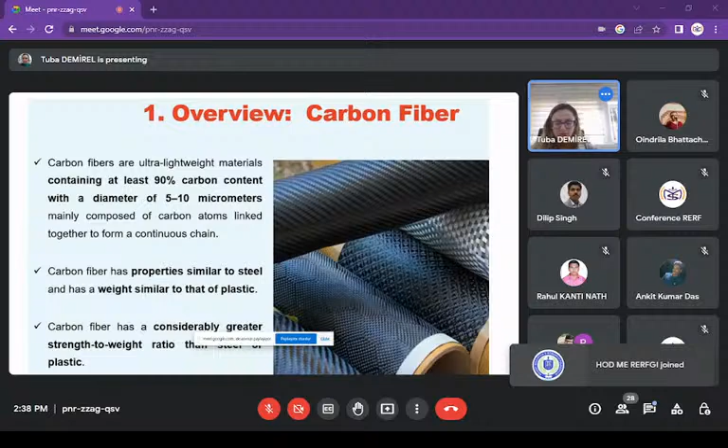The definition of carbon fiber and its historical development: carbon fiber is a polymer, sometimes known as graphite, with a strong molecular structure. The original carbon fiber concept traces back to inventor Thomas Edison, who applied it to light bulbs.

Properties of carbon fibers include high tensile strength and rigidity, corrosion resistance, electric conductivity, and a very important property: fire resistance.

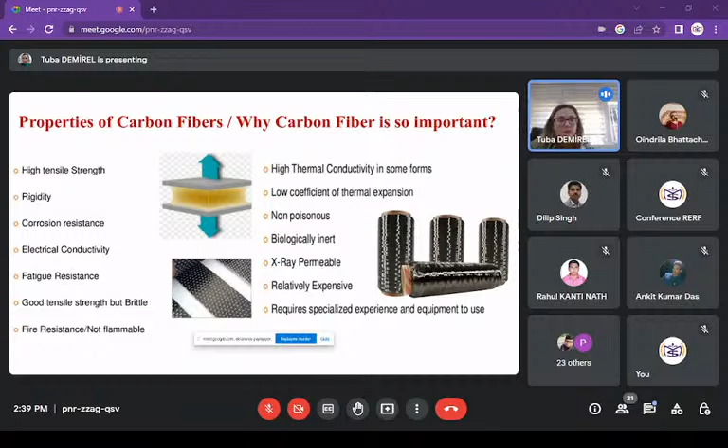Carbon fiber is used especially in textile sectors and composite sectors. In the market, low cost fibers will become a reality in the next 10 to 12 years, and the carbon fiber market has grown at an annual average rate of a significant percentage over the last 20 years.

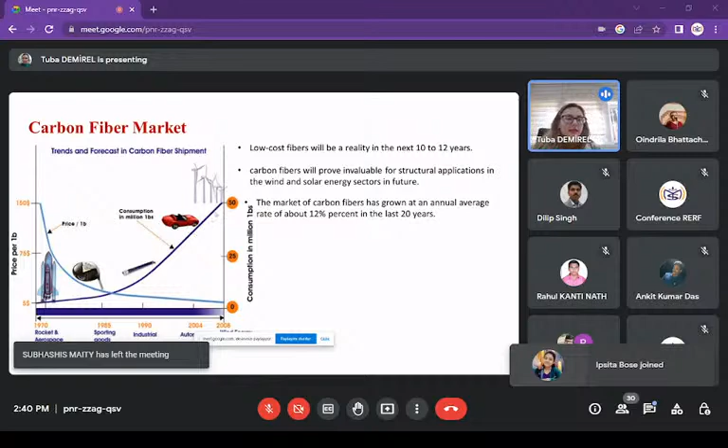Looking at this picture, we see the increasing use of carbon in industry, especially in carbon polymer composites. Applications are very important, particularly in civil engineering and automotive parts.

In aerospace engineering, today's technology uses carbon composite materials in the aerospace industry because they do not flame when heated, even under very high heating conditions.

Medical applications are very important today because carbon fiber polymer composites are strong materials that are lighter in weight than steel.

There is use of carbon fiber reinforced polymer in implants and other processing applications. The structure of carbon fiber is also very important.

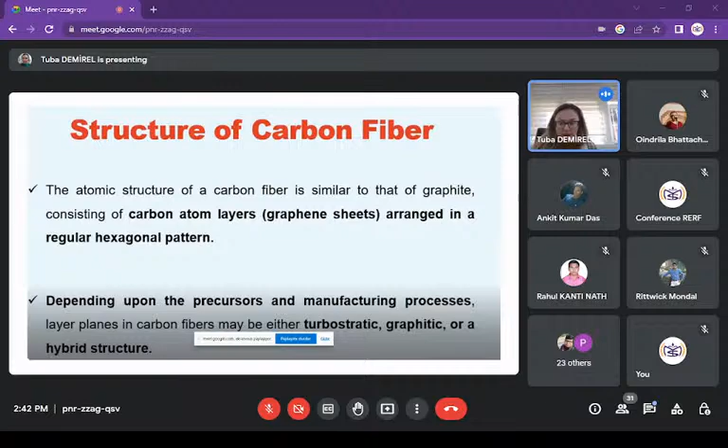Carbon atom layers, also known as graphene sheets, are arranged in a regular hexagonal pattern. Depending upon the precursor and manufacturing process, layer planes in carbon fibers may be either turbostratic, graphitic, or a hybrid structure.

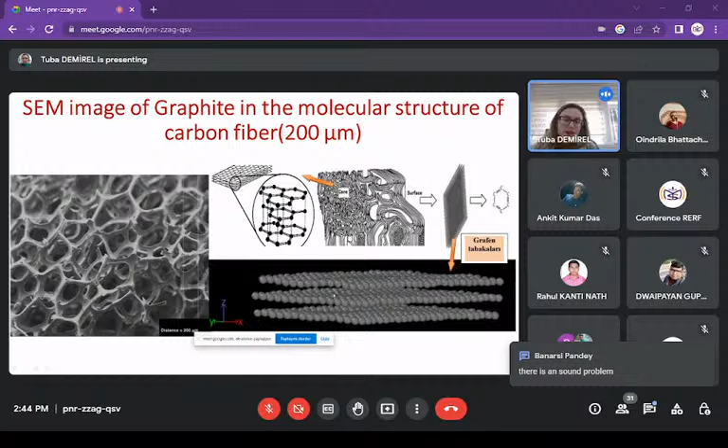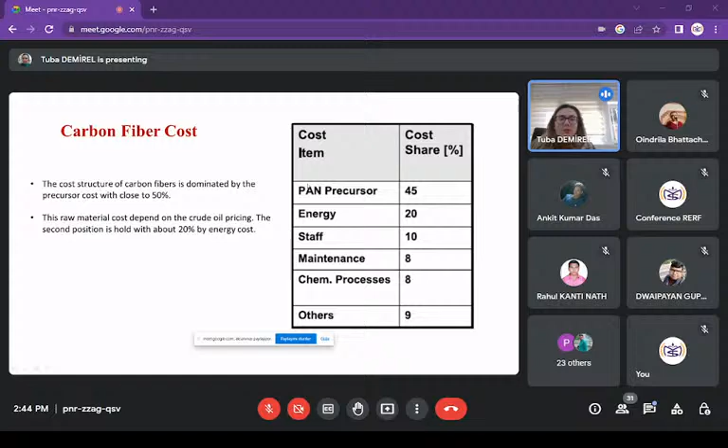What is carbon fiber made from? Looking at production from research, the main original materials for carbon fibers are PAN, viscose rayon, and pitch.

PAN fiber is made from PAN raw material. Viscose rayon is made from cellulose. Pitch is a much less expensive raw material than PAN.

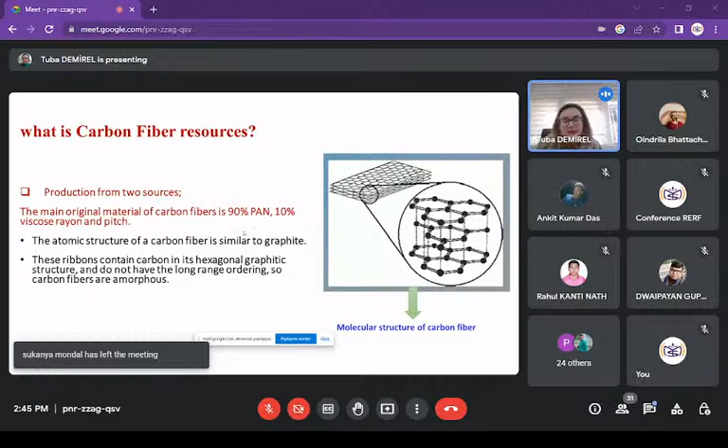The atomic structure of carbon fiber is similar to graphite. Commercial precursors for carbon fiber manufacturing include PAN from crude oil, rayon from cellulose, and pitch from petroleum or coal tar, including mesophase pitch.

Average tensile strength is very important; PAN has better tensile strength than other raw materials, and its carbon yield is also notable.

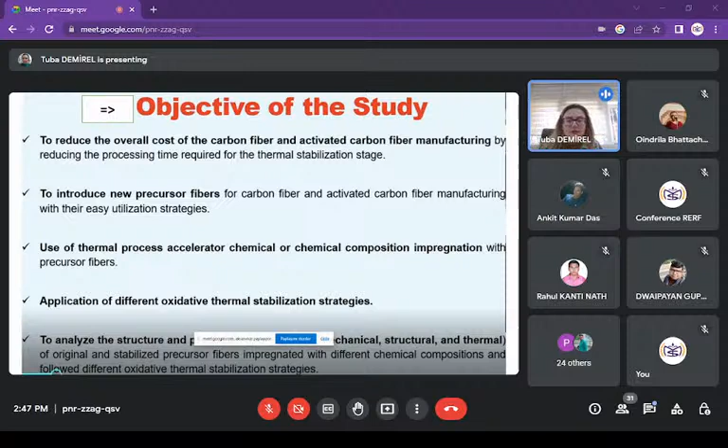This involves use of a thermal process accelerator, chemical composition impregnation with precursor fibers, and application of different oxidative thermal stabilization strategies.

Looking at the production stages: stabilization fiber, carbon fiber, and activated carbon fiber are the three main production stages. The first stage, for carbon fiber, is the stabilization or oxidation stage, occurring at 200 to 300 degrees centigrade with a heating time in an air atmosphere.

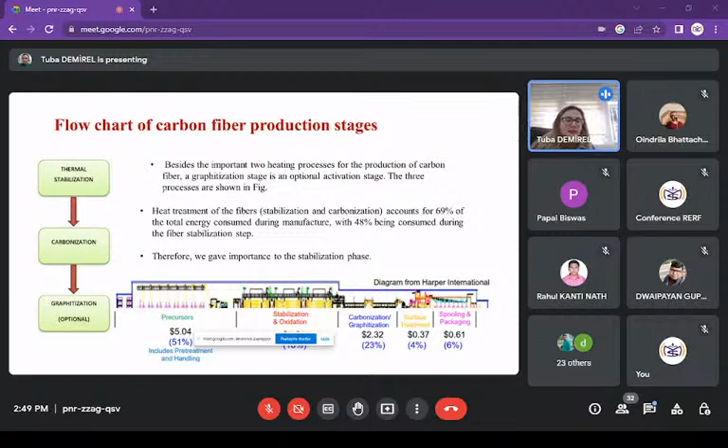Heat treatment of fibers accounts for 69% of the total energy consumed during manufacture, with 48% being consumed during the fiber stabilization step, so we give importance to the stabilization phase.

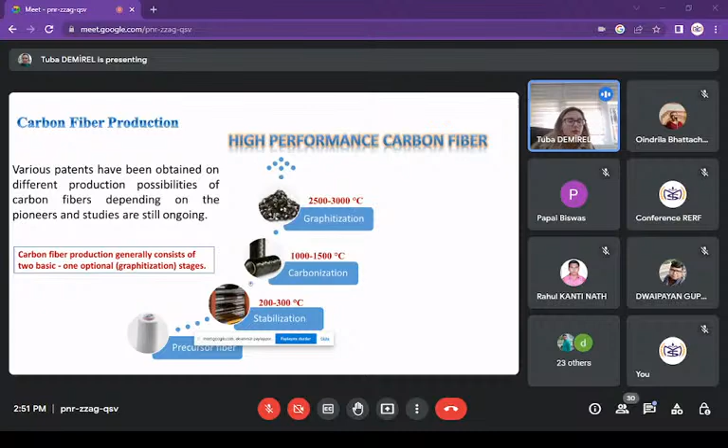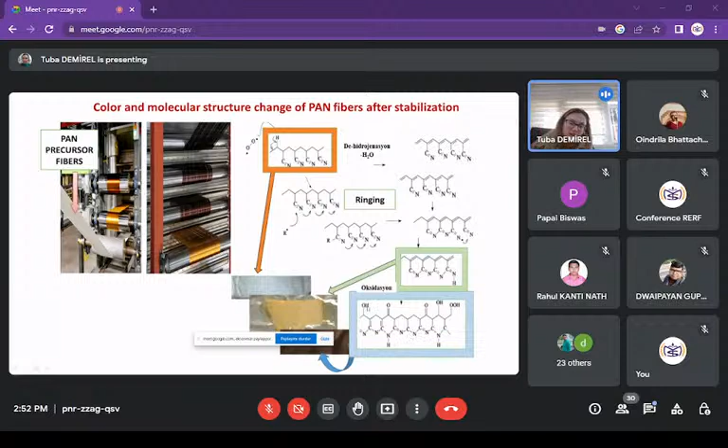This shows the color changing and oxidation process, with the whole ringing molecular structure. These are the fast carbonization stage and graphitization stage, showing the whole ringing molecular structure.

Objective of the study: to reduce overall carbon fiber and activated carbon fiber manufacturing processing time required for the thermal stabilization stage.

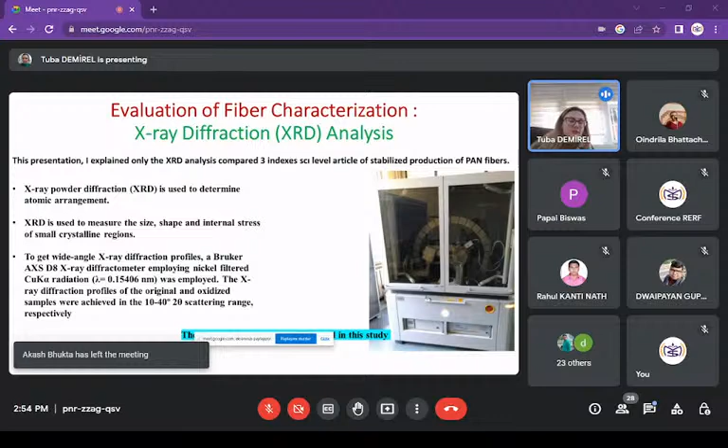X-ray diffraction analysis is very important because it determines atomic arrangement and is used to measure the size, shape, and internal stress of small crystalline regions.

In my experimental studies, I published articles. I will explain my first article: a study on structural characterization of thermal stabilized PAN precursor fibers impregnated with ammonium bromide before the carbonization stage.

This covers thermal oxidative stabilization of polyacrylonitrile PAN fiber pre-treated with 5% ammonium bromide, performed in air atmosphere at temperatures between 200 and 250 centigrade for periods of 5 to 75 minutes using a multi-step approach.

The studies demonstrate that ammonium bromide incorporation is highly effective in accelerating nitrile group cyclization by reducing the time required for thermal stabilization; this structure is very important, and ammonium bromide accelerates the stabilization process.

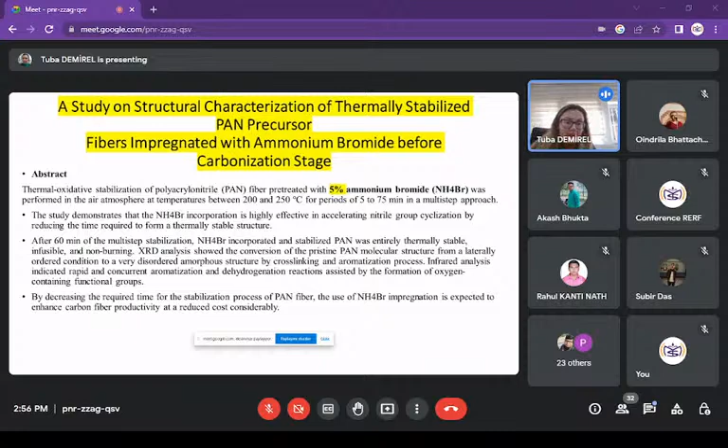The use of ammonium bromide impregnation is expected to enhance carbon fiber productivity and reduce cost considerably.

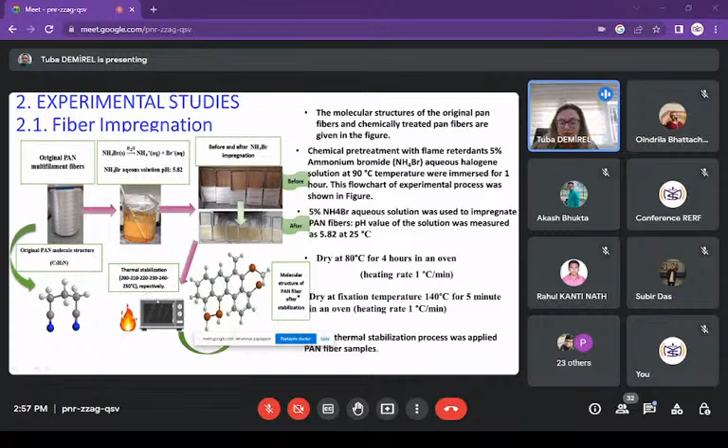This shows my fiber impregnation process: the fiber is treated with ammonium bromide water solution for impregnation, then dried in an oven, followed by multi-step stabilization respectively, resulting in whole black fibers.

The fiber stabilization pictures are shown on the left.

Using FTIR analysis, it has been observed that fiber burning is influenced by the accelerated cyclization reactions, resulting in non-burning behavior after stabilization.

After stabilization at 30 minutes compared to 5 minutes and 15 minutes stabilization time, it is clear that the pictures gradually change from white to reddish brown to blackish and black during thermal pretreatment in air atmosphere with increasing temperature and stabilization time.

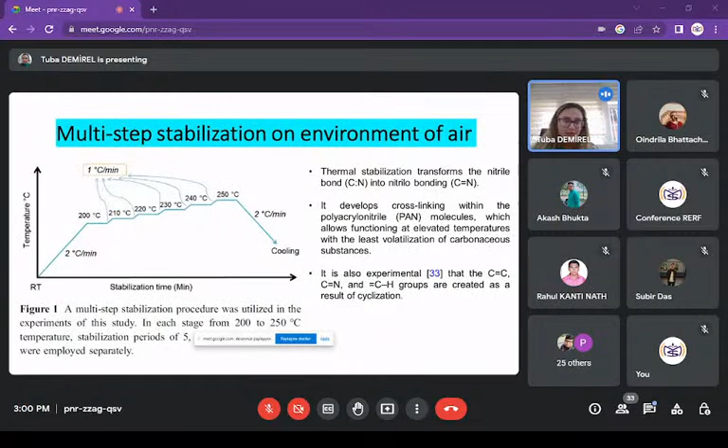With the same stabilization time, the ammonium persulfate treatment shows color change in the fibers.

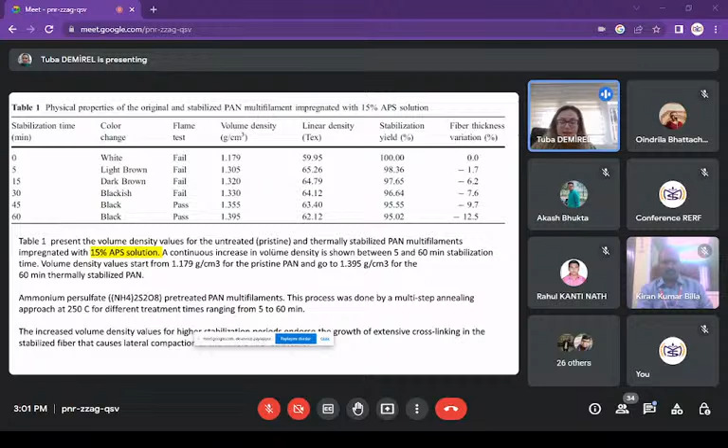These experimental conclusions show increased volume density values for higher stabilization periods, and the growth of extensive cross-linking. Cross-linking is a ring molecular structure important in the stabilized fiber that causes lateral compaction, affecting this fiber's physical and mechanical properties.

With 15% ammonium persulfate impregnated, the volume density will increase. Linear density increases rather than reduces, and tensile strength permanently reduces.

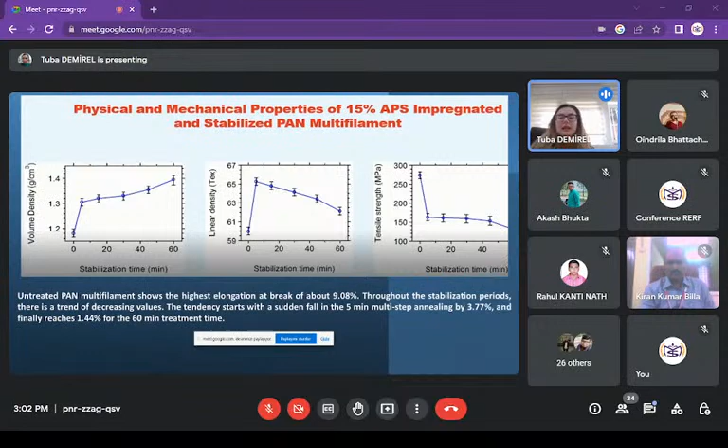Other articles discuss the impact of guanidine carbonate incorporation. In this article we use guanidine carbonate at 15%, which was found to be optimum incorporation in the precursor fibers as an accelerant, the same as the other accelerants used.

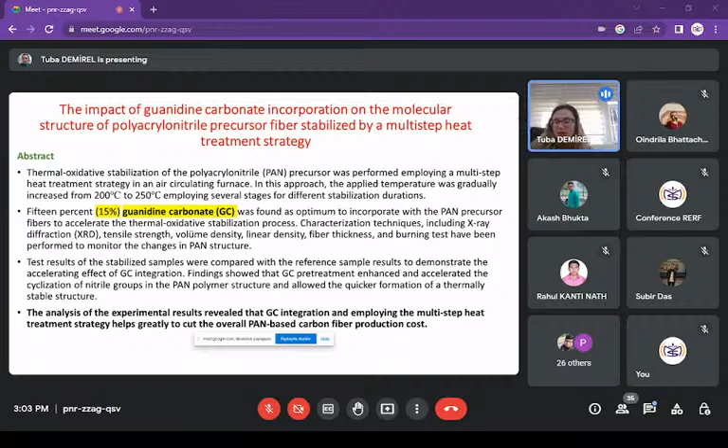Analyzing the same as the other two articles, characterization technique is very important: XRD for carbon fibers is very important, and FTIR analysis is also very important, as these present and explain the molecular structure and the multi-step stabilization, systematic diagram, and experimental results are very important.

For compositions and physical properties: 5% ammonium bromide in water solution, 15% ammonium persulfate in water solution, and 15% guanidine carbonate in water solution. Then the raw material or precursor PAN fibers are impregnated.

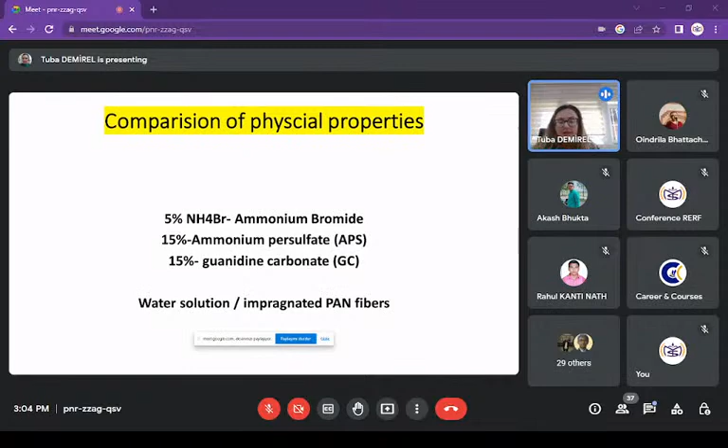Comparing the physical properties of guanidine carbonate and ammonium bromide: guanidine carbonate has a 45-minute stabilization time, while ammonium bromide is 60 minutes, and ammonium persulfate stabilization time is 45 minutes.

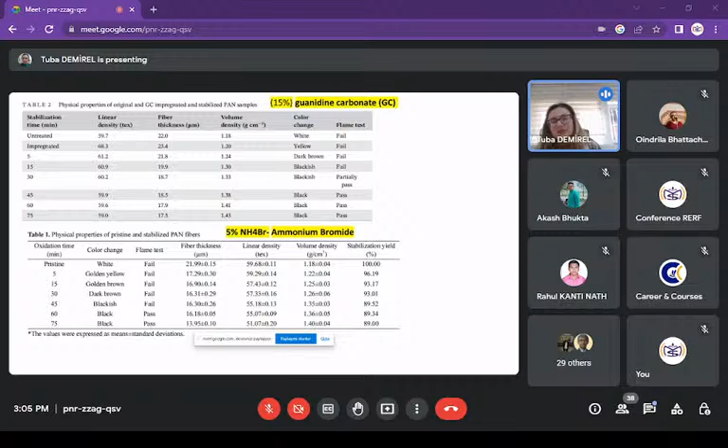Accelerating is the stabilization stage. Comparing guanidine carbonate and ammonium persulfate at the same concentration, the 45-minute stabilization time gives black color for guanidine carbonate, and ammonium persulfate at 45 minutes gives the same black color.

Converting the color changing, then looking at linear density, this is 63 linear density. This shows mechanical properties are very good for ammonium persulfate.

In the XRD of the original PAN, there are two dominant bands with spacing in nanometer indexing, and this indexing is 100 and 110 corresponding to the hexagonal unit cell.

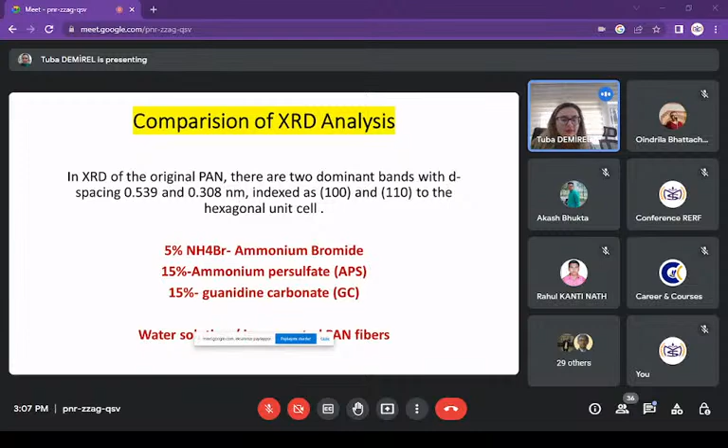This comparison shows the best chemical water solution is respectively very important. Guanidine carbonate has very good mechanical properties, then ammonium persulfate, and then ammonium bromide is a good material, but guanidine carbonate is best. This is X-ray crystallinity comparison.

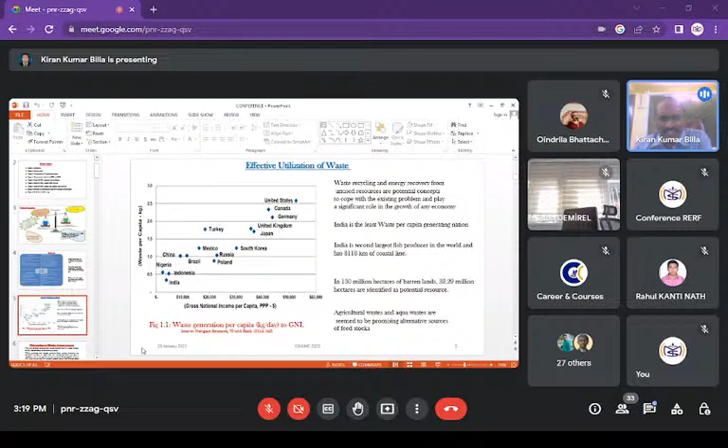That's an issue. This is about waste utilization in countries. Though India is in a last position among waste generating countries, we have to think of our neighbors also. The United States is the highest waste generating country, and they are utilizing the waste too. That is another issue.

In my short span of 2 or 3 years of research in this area, I have found vast fish discards - we have a very lengthy coastal line of 8,118 kilometers, in which huge discards are generated annually. This is gently pushing away what could be a valuable feedstock - we could utilize it, but we are just pushing it into the sea, oceans and rivers also.

If we segregate some part of that fatty mass, like heads, tails and some skin, we have so much fat in that, and that fat can be converted into biodiesel, which can be utilized. Of course, we have some issues with the biodiesel, which I'll discuss in the last part. So first, we can generate some useful outcome through that waste.

Secondly, another area I have found is we have a huge potential area of what you call wasteland. We can't really call it wasteland, but unproductive land. Government sources estimate around 32 million hectares of unproductive land have been identified. And not only that, we have a huge amount of rural roads and highways, so if we use the land on both sides of these roads...

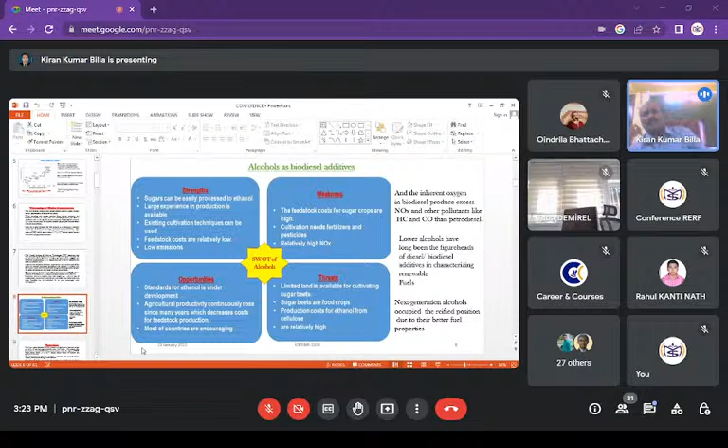So I already told you these biodiesels have some operational problems, like heavy fumes and toxic gases coming out. So particularly for that problem, people generally use additives to compensate.

In my perspective, I have gone through some papers where they have used, and also practically generated, higher alcohols. Generally, lower alcohols is what I found being used in the literature. But on the other hand, if we use higher alcohols in place of lower alcohols, we can have better versions of future fuels. I found practical examples like N-octanol and pentanol.

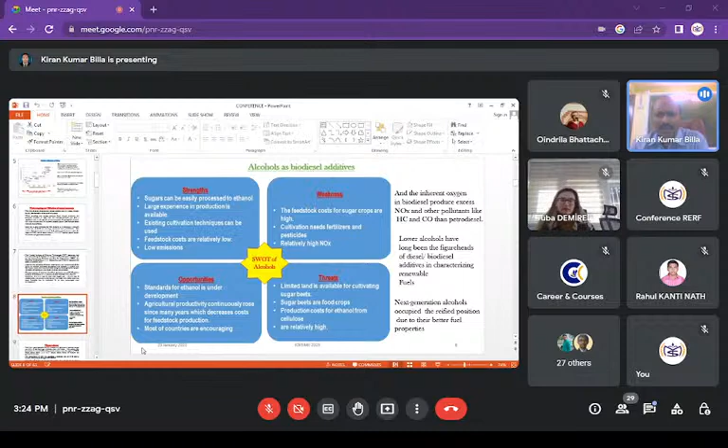These higher alcohols are easy to generate. They can be produced in a renewable way, and we can operate with them economically. So these can be, we could say, next generation alcohols. In a sense, they will occupy the refined position of lower alcohols.

Coming to that, I told you I've gone through literature reviews using lower alcohols, and very few using higher alcohols, particularly with these waste biodiesels generated using Jatropha and fish oil. So using higher alcohols with Jatropha, what I found is it's very viscous in nature, and it produces so much NOx.

Lowering that NOx is an issue with Jatropha. And using fish oil, which I generated from fish waste, what I found is heavy carbon monoxide is coming out. That's another issue I encountered.

So what I found is using another additive to suppress this NOx in one experiment, and in the other, if we try to control this excess CO using another additive, that will be helpful. I'll come to my first experiment.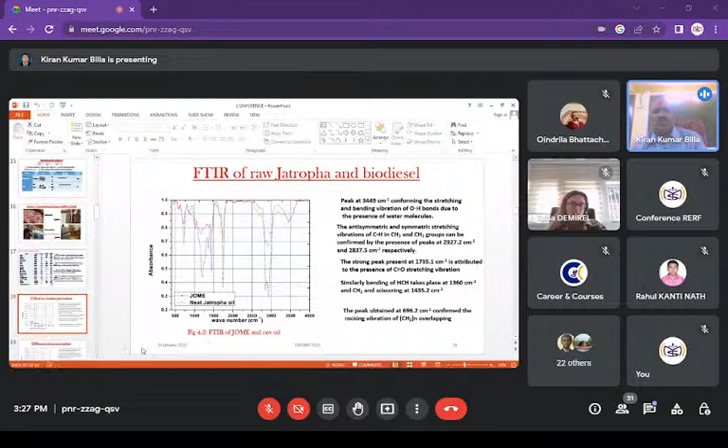Neat oils can be converted into biodiesels using transesterification. Using that phenomena, I have converted jatropha oil to biodiesel and fish oil to fish oil biodiesel. This is the other oil I have prepared - fish oil, with methyl esters of fish oil, MEFO.

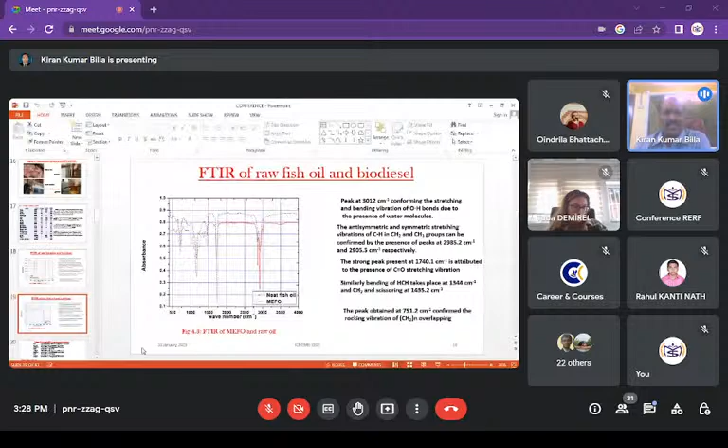Next, I have utilized 5% pentanol in this experiment. Many literatures I have found using higher amounts of fish oil, which is giving more NOx, more CO, and giving exacerbated NOx and exacerbated CO also. So in some literature I have found exacerbated NOx, and in some I have found exacerbated CO.

So I tried 30% of fish oil biodiesel also, but I'm not satisfied with the results they produced. That's why I reduced my extent to 20%, which I found to be very good - more compatible with diesel-like properties.

So what I blended is 20% fish oil with 5% pentanol, a heavy alcohol, higher alcohol we can say. That is a better combination, and I have utilized 25 with 5%, 20 with 10%, 30 fish oil with 5%, and 30 fish oil with 10% pentanol also.

These are the properties, and you can see M20 oil and M20 5% pentanol is almost equal to diesel, very compatible with diesel property. These are the baseline properties - fish oil, biodiesel, diesel. These are the properties of the base oils.

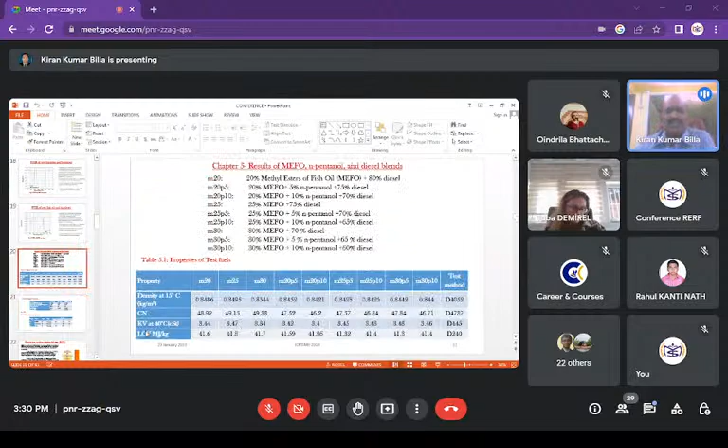Without going into the vast statistics generated by the engine, I have utilized response surface methodology to analyze the engine data produced with this numerous amount of combinations. I have utilized nearly 9 different types of combinations of fuel. Using that huge data, we call this analyzer using response surface methodology.

Response surface methodology - here I have utilized 3 input parameters: 20% fish oil, 25% fish oil, and 30% fish oil. There are 3 variables. I have utilized design matrix 3 into 3 into 3. The second parameter is pentanol - 0, 5, and 10. The last one is load: no load conditions, part load conditions at 0.5, and full load conditions at 1. These are the combustion aspects, where M20...

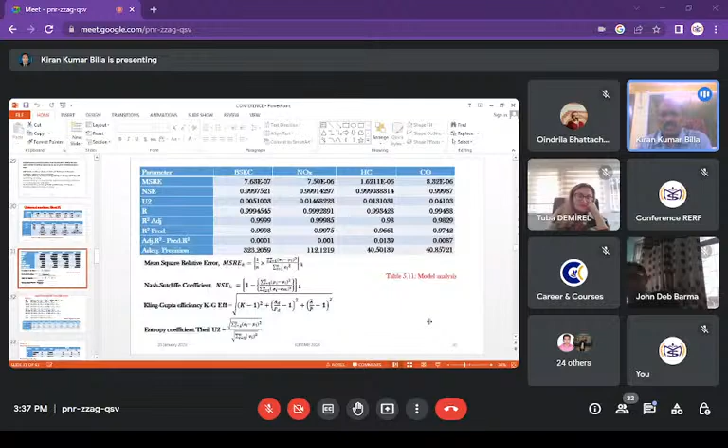Coming to the next one, I have utilized N-octanol with Jatropha oil. In this experiment, I have utilized the same 20% Jatropha, and 5 to 10% of N-octanol. So we can see the properties here.

In this second model, the three input parameters are N-octanol percentage, DEE percentage, and load. I utilized DEE because in my experiment I saw that the cetane number of the fuel was coming low, so I used a small amount, 2% to 4% DEE, to increase the cetane number of the fuel, since cetane number is an index of combustion. That's why I utilized DEE, to give good results.

So here I have utilized three inputs: N-octanol at 0, 5, and 10%, DEE at 0 to 4%, and load at 0%, 50%, and full load. In this one also the output parameters are the same. I checked carbon monoxide, unburnt hydrocarbons, NOx, and finally brake specific energy consumption.

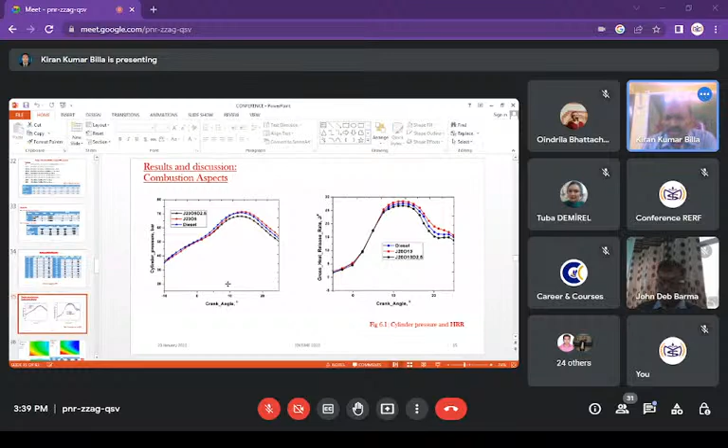Coming to another important experiment: as I told you, using 20% Jatropha oil and 5% to 10% N-octanol, the oxygen percentage and thickness get a little higher than conventional, which causes some oxygen and thickness issues.

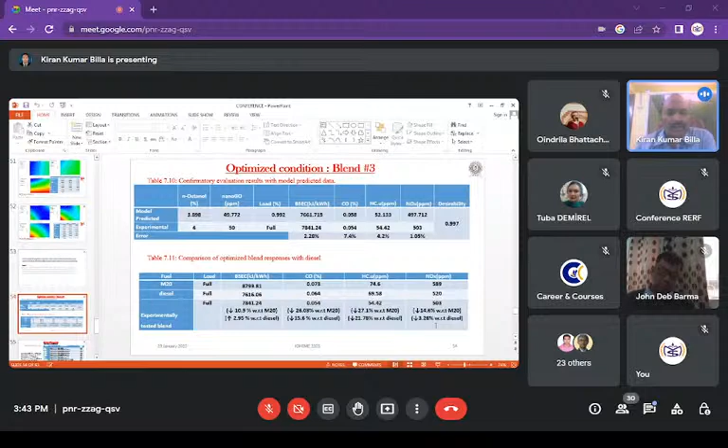The only issue is with storage, the oxygen content of the blend. What I can say from the experiment is, whenever you prepare that blend, you have to utilize it as quickly as possible, within 72 hours, or the efficiency will go down. So these are the conclusions.

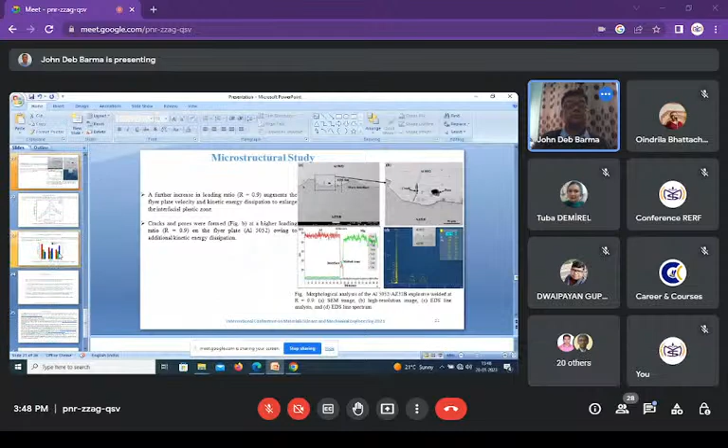Is my screen visible? Yes sir. As we can see on the screen, the topic is fabrication of AZ31B and AL5052 composite plates. AZ31B is a magnesium alloy and aluminum 5052, and this composite has been made through the explosive welding technique.

My presentation will be divided as follows: first introduction, then applications of the process, objectives, parent materials and their properties, experimental conditions and setup, microstructural study, mechanical properties, and finally conclusions.

So if we talk about explosive welding, maybe many of us already know the technique. It is basically a joining technique. Among the different welding techniques, in this one, the controlled energy of a detonating chemical explosive is used to create a metallurgical bond. The materials to be joined can be similar or dissimilar.

As we initiate the explosion, the chemical energy stored in the explosive is converted instantaneously into kinetic energy, which forces the flyer plate to impinge obliquely with the base plate to craft a metallurgically strong bond. So whatever we get as a result becomes metallurgically very strong.

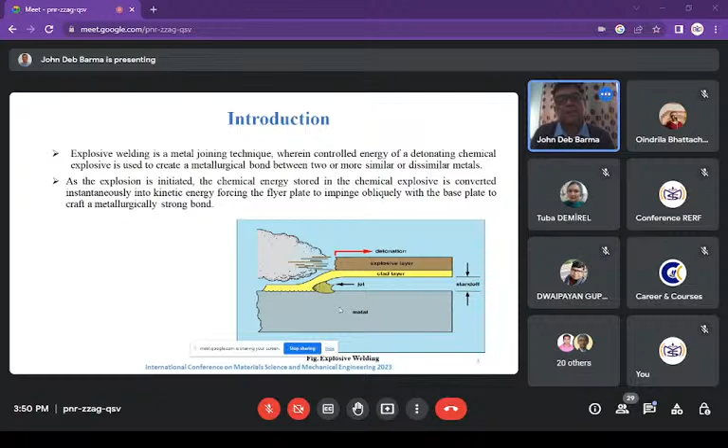Now, if we look at the principles of this welding technique, we can see that a controlled detonation of the explosive is used on the surfaces of the welding that is to be done. So when the explosion happens, it generates a high pressure force, which deforms the work plates plastically. And as the work plates deform plastically, it forms a metallurgical bond between these two plates.

The detonation process occurs for a very short period of time, and since it occurs for such a short period, the parent material doesn't get damaged. So that is the beauty about this welding process.

Now certainly there are some welding parameters which are very important in this welding, because these influence the welding, like standoff distance, velocity of detonation, how we are preparing the surface, and what kind of explosive we're using. So all these are very important.

As we can see in the figure, this is where we put the explosive, and this plate is known as the buffer plate, and this is the flyer plate. Welding between the flyer plate and the base plate takes place, and we keep a standoff distance.

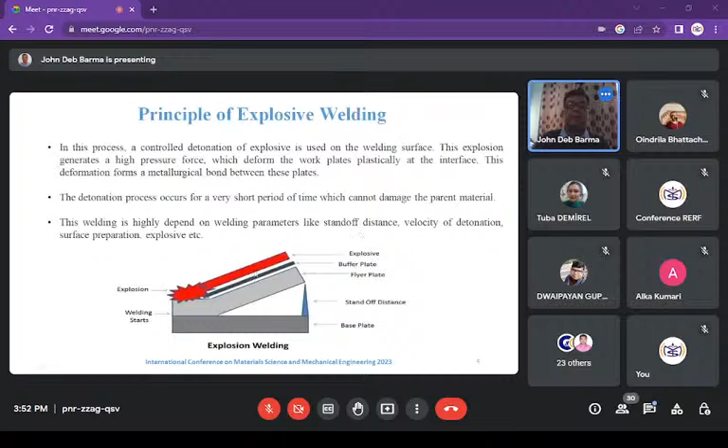Either you can keep the flyer plate parallel or at an angle on the base plate. As you can see in the figure, it is kept at an angle, but you can also keep it parallel. Then we have the buffer plate, situated on the flyer plate, which minimizes the effect of explosion. We always keep a standoff distance between the flyer plate and the base plate. Generally, double the thickness of the flyer plate is taken for thin plates, and equal to the thickness of the flyer plate for thick plates.

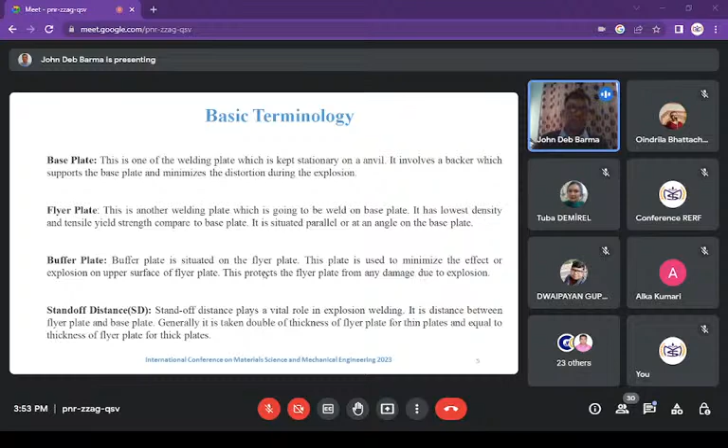Collision point velocity has to be less than the sonic velocity. There is another important term called the loading ratio, which is the ratio of mass of explosive to the mass of flyer plate. If the loading ratio is below the critical value, the terminal velocity of the flyer plate is insufficient and bonding will not take place.

On the other hand, if we keep a large ratio, it will produce molten zones and ultimately some damage will occur. As I already mentioned, the explosive is very important, and it is placed over the flyer plate. Mostly RDX, TNT, Sun 90, PETN, all these can be used as explosives.

Then important is the velocity of detonation, which means the rate at which the explosive detonates. It should be kept less than 120% of the sonic velocity. Remember that it is dependent on the type of explosive material as well as its density, so whatever velocity of detonation we choose will depend on these factors.

This slide shows the types of explosive welding: parallel configuration and inclined configuration, both of which can be used. As you can see on the left hand side, this is the parallel configuration, and on the right hand side, this shows the inclined configuration.

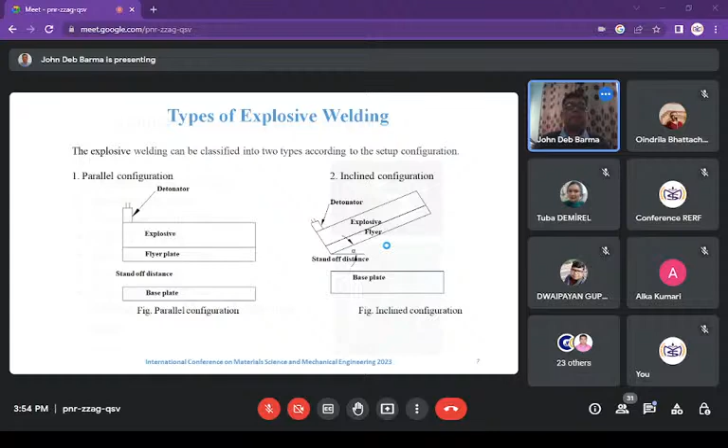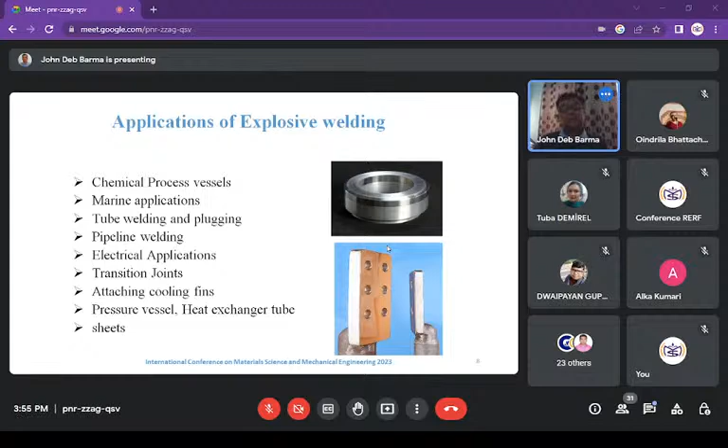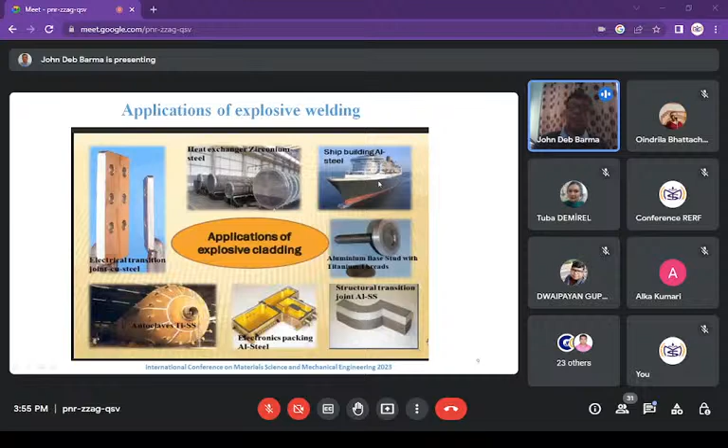Now, where can we use this? In ships, chemical process vessels, tube welding and plugging, pipeline welding, transition joints, attaching cooling fins, pressure vessels, heat exchanger tubes, and very large sheets. So you can see some of the applications. If you visit some shipbuilding factories, explosive welding is very popular there.

Now, for this particular topic, if we talk about the objectives, we have used the explosive welding technique to create a joint between Al5052 and AZ31 composite plates, using different loading ratios of 0.7, 0.8, and 0.9. Here we particularly discuss the characterization of the microstructure as well as mechanical properties of the joint at different loading ratios.

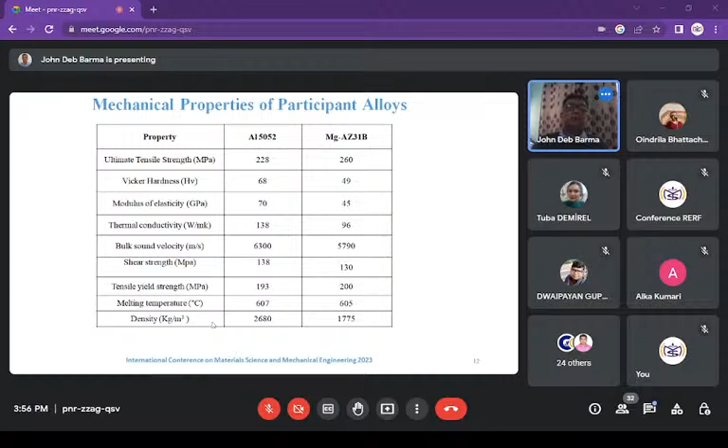Particularly, you can see that this is the work of Mr. Pravat, he is my PhD student.

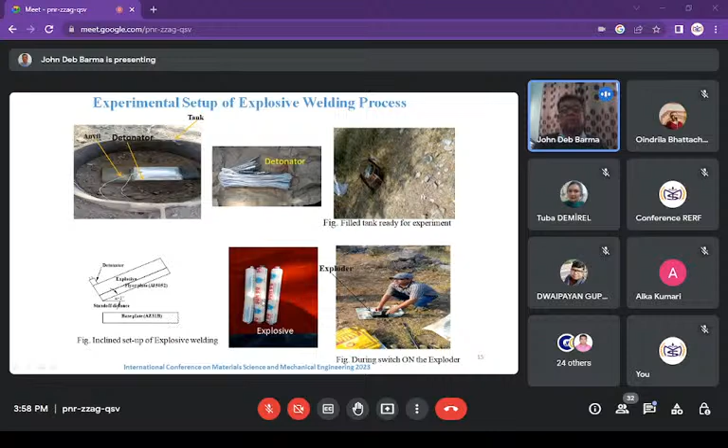And this is the detonator working. As I already mentioned, it is capped on the anvil. So this is the anvil, and this is the tank, to maintain safety. This is the detonator that we have used. This is the filled tank which is ready for the experiment. And this is the inclined setup of explosive welding. This is the explosive that we have used, and this is the exploder.

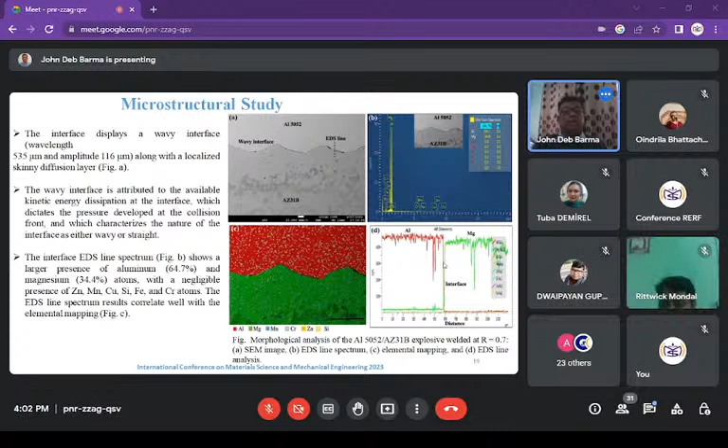Now here, the increase is attributed to the additional kinetic energy dissipation and the pressure that is developed at the interface.

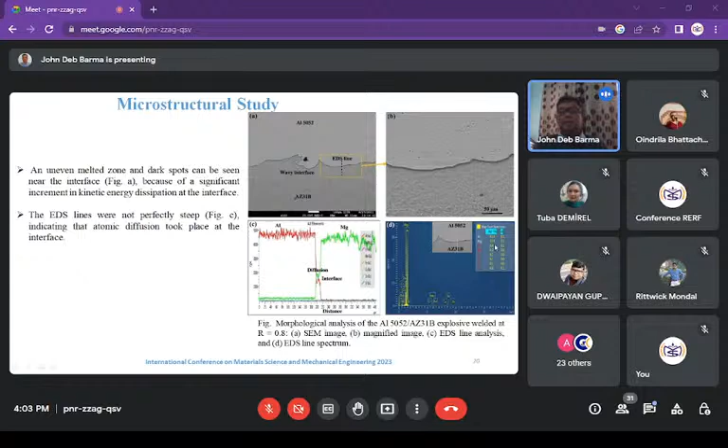And the EDS line spectrum, figure D, shows that the interface contains 61.6% aluminium and 37.4% magnesium, while other elements like zinc, manganese, copper, silicon, ferrous, and chromium are also present. And after going for a further increase in the loading ratio, that is at 0.9,

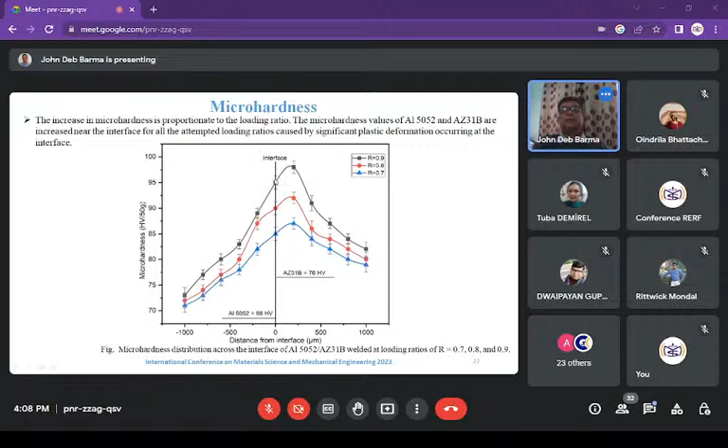Also the micro hardness value of this aluminum 5052 and AZ31B are increased more at the interface, as you can see, for all the attempted loading ratios. Here it is at the interface. These are significantly more in comparison to these values. So you can say that this is more because this is caused by significant plastic deformation which took place occurring at the interface.

Now, if we talk about the tensile and shear strengths, we have seen that the tensile and shear strengths are found to be maximum at lower loading ratios, that is 0.7. Because, you see, there is a relationship between hardness and tensile strength also. So tensile and shear strength were maximum at lower loading ratio, 0.7, and minimum at higher loading ratio, 0.9. We have also observed the presence of crack, pore, as well as uneven melted layer, which resulted in reduced strength for high loading ratio, that is 0.8 and 0.9.

Now, actually, mechanical properties are dictated by fracture morphology. The fracture morphology of the ram tensile sample welded at 0.7 demonstrates excellent integrity, with no visible cracks and no pores on the interface. The fracture found was homogeneous, and no cracks emerged due to the small melted layer generated on the interface.

In contrast, at higher loading ratios, we have seen apparent ductile rupture characteristics, with a massive number of dimples, grooves, or cracks on the interface. The appearance of these grooves and the solidified melts of the welded sample agree with earlier research reports. In addition, the elongation to fracture of this AA5052 and AZ31B welded composite plates increased significantly as the loading ratio increased.

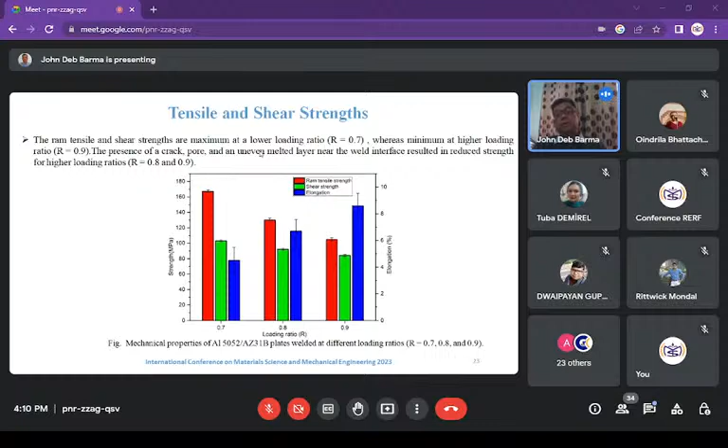We have seen the wavy interface formed between the aluminum 5052 and AZ31B plates, which were welded at all attempted loading ratios, that is 0.7, 0.8, and 0.9. It was also noticed that the amplitude and wavelength of the wave interface increased with the loading ratio.

It was also noticed that the increase in microhardness is proportional to the loading ratios, as seen in the graph. The microhardness values of aluminum 5052 and AZ31B increased near the interface for all attempted loading ratios, which were caused by the significant plastic deformation occurring at the interface.

At lower loading ratio, a thin diffusion layer as well as a unified interface without any cracks, dimple formation, or pores were formed, which resulted in the maximum result. Since those defects were not present, this ultimately resulted in the maximum ram tensile strength of 167 megapascal and shear strength of 103 megapascal. We can conclude that a sound composite joint was achieved at lower loading ratios. So these are the references, and thank you.

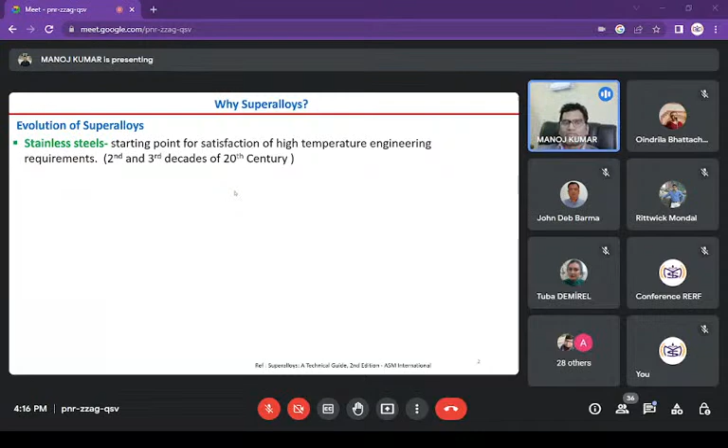For mankind, the first satisfactory high temperature engineering material was stainless steel. But after a few decades of use, they realized it is limited in strength capability for very aggressive use in components. So they started looking for some kind of superalloys. What are those superalloys?

Superalloys came up since stainless steel, an iron based alloy, was the first satisfactory material. So they first developed iron based superalloys, then moved to cobalt based superalloys, and then nickel chromium based superalloys, which includes inconels and nimonics. Let us understand what is super about these superalloys.

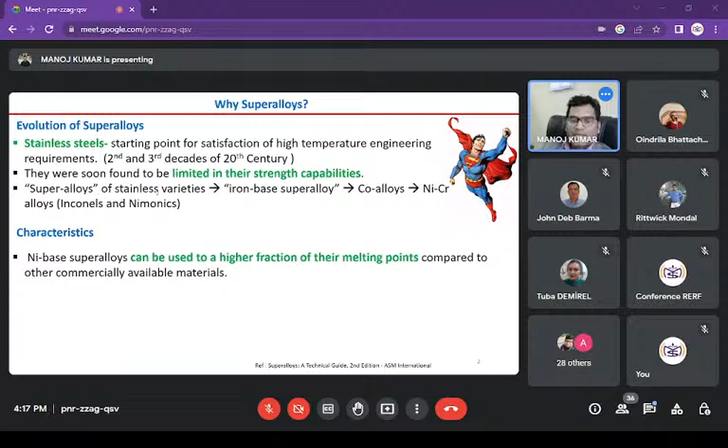These alloys can be used for a higher fraction of their melting points. This means these materials are capable of functioning at elevated temperature, and also have greater oxidation resistance, which again makes them suitable for application at elevated temperature.

However, it is realized that superalloys, especially nickel based superalloys, specifically Inconel 718, do not survive for a long time without developing mechanical failure above 650 to 700 degrees Celsius. This requires a coating, and that coating should help dropping the temperature from the ambient side to the internal component side. So coating is actually an integral part of superalloy development and their applications.

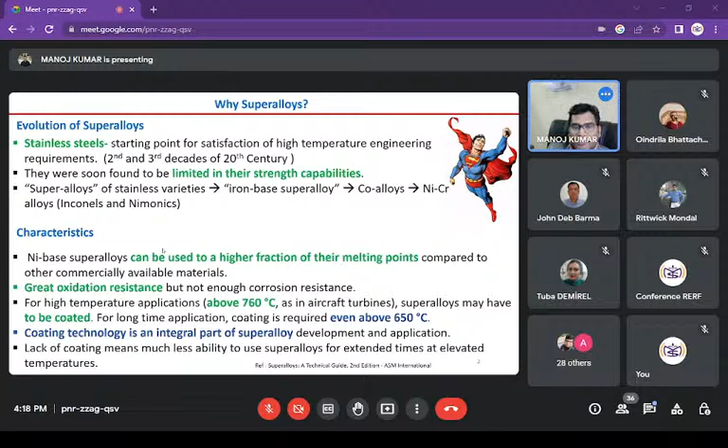Let us understand where these coatings and alloys are used. A typical example is turbine blades in aerospace. In turbine blades, vanes, and discs are the components where superalloys are used, which are subjected to operating at 1600 degrees Celsius and above. So which metal can survive? Hardly any metallic material without coating assistance can survive in such situations.

So they require thermal barrier coating, TBC. These TBCs are produced by atmospheric plasma spray or electron beam PVD process with inlet cooling system, so there is a coating and also an internal cooling system to cool it down during the process. These TBCs have been in use for quite a long time, but there are still some problems associated with this, like a sharp interface.

When you deposit a ceramic coating over the metal, there is an intrinsic difference between the characteristics of the metallic substrate and the ceramic top coat. They do not match together in terms of properties, so there is a sharp interface between the metal and the ceramic coat. This always leads to development of stresses at the interface and adherence issues, and that leads to failure of the coating. So what can be the solution?

In today's era, laser is the solution for so many metallurgical problems. I'll talk about details in coming slides. We call it laser assisted manufacturing. We can deploy laser to develop coatings of intermetallics, ceramic matrix composite, or metal matrix composite, by processes called laser surface alloying and laser surface cladding.

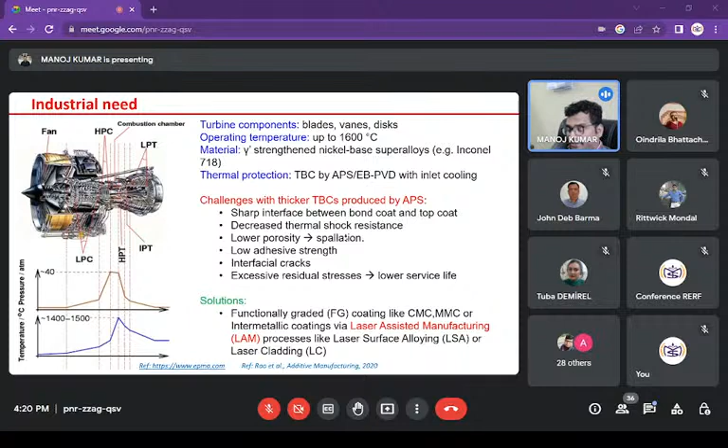Now coming to the use of laser, let me introduce the basic principle of laser. Laser stands for light amplification by stimulated emission of radiation. This is how it differs from normal visible light that we use. This is stimulated emission.

How does it work? From physics, we understand electrons are at ground state, and when we pump it, it goes to a much higher orbital, but these orbitals are short-lived for electrons. So the electrons come down and settle around a metastable state. When electrons are pumped from E1 to E3, it settles at E2. It requires some stimulation, and when you give that stimulation, the electron settles from E2 to E1, releasing a discrete, fixed amount of energy, and that's the laser energy. This laser science itself is a big deal.

I just wanted to give you a little understanding of laser first, because we'll be talking about laser throughout the presentation today.

These lasers can be applied in various processes and sectors. Lasers can be used for cleaning of metallic or even ceramic surfaces, welding of materials, cutting, additive manufacturing like 3D printing, ablation, drilling, engraving, and many more. This covers sectors like medical, 3D printing in manufacturing, electronics, aeronautics, and jewelry, where they require laser processing for fine joining or cleaning, as well as sensors, automobiles, and so forth.

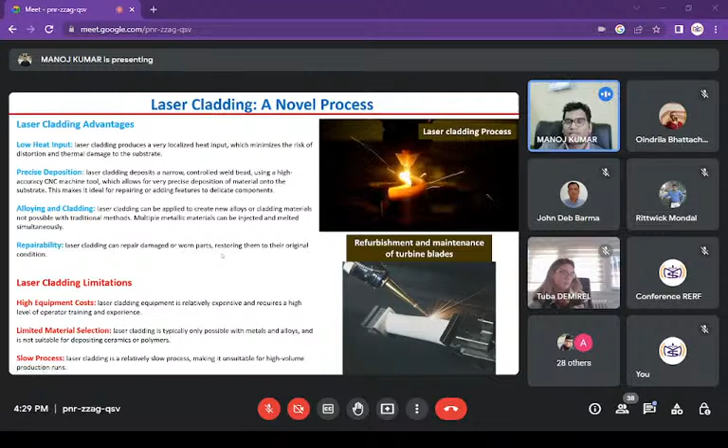Another point is, it is a slow process compared to thermal spray coatings. The deposition rate is slower than the other coating processes. But still, having all these limitations, the advantages of this cladding win over, and it's opening a bigger space for researchers to develop novel technology and come up with new ideas.

Now, by laser cladding or laser coating, we can have - cladding is basically depositing a new material over the existing component or existing material. And alloying is, you're having a metal surface or the component, you can just selectively melt the surface of the material and supply some foreign element and melt it together. And when it solidifies into a different phase, a different material altogether, it still happens within the given component. There is no additional deposition over it. So this is the difference between alloying and cladding.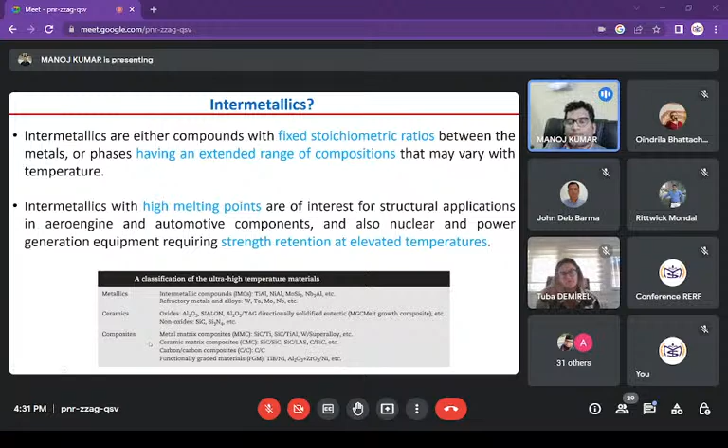So by alloying, we can have intermetallic coatings. And why intermetallic coatings? Because they offer high melting points and also retain their mechanical property at elevated temperature. For reference, I have given some examples here. After metallic, there are some ceramic and other composites which are capable of high temperature protection for the underlying components.

Now, having said all this, I'll present two chunks of work from my experiences. One is from laser surface alloying. So we tried to alloy the surface of Inconel 718 with silicon, aluminum, and ZrB2.

The idea was, when we alloy Inconel 718 which consists of nickel, iron, chromium, so when we melt with silicon, it will form some nickel silicide, iron silicide, chromium silicides, right? These nickel silicides and other silicides are intermetallics of high melting points and stable at elevated temperatures. Same thing will happen with aluminum - if you alloy with aluminum, it will form aluminides, and they are again very good candidates for high temperature protection.

Interestingly, we also tried with ZrB2, and it gives very different results. It started forming some borides and some complex zirconates. Those are also stable at high temperature, but at the end we realized that silicon registers the best protection, followed by aluminum and then ZrB2.

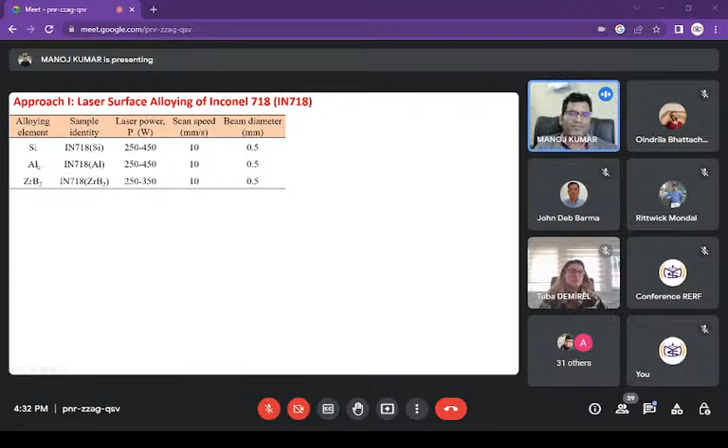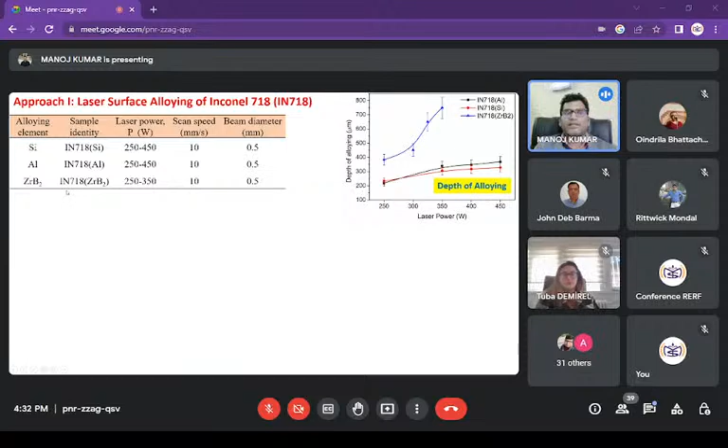So what we achieved with this is that when we started alloying with varying laser power, we got different depths of alloying. Obviously, when we increase the laser power, the heat input will increase and the depth of alloying will increase. Interestingly, with ZrB2, the increase of depth of alloying was exponential - very high with a slight increase of laser power, and that can be attributed to some exothermic reaction taking place during dissociation of ZrB2.

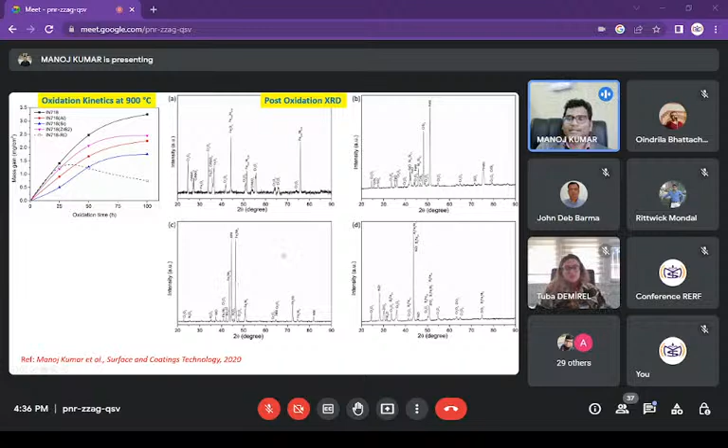And after oxidation, we took out the sample. We tried to understand what phases are forming, and why the silicon alloyed surface is not getting highly oxidized is very evident from its oxide profile, that many of the silicides, we can see nickel silicides, are still unaffected. They are still stable at 900 degrees Celsius of exposure. And again for NiAl, all these are stable at 900 degrees Celsius. That is why they are able to offer oxidation resistance. They are not getting oxidized.

We find significant improvement of oxidation resistance and improvement of hardness and other tribological properties by alloying.

So coming to approach 2. Now in this approach, we did not alloy. We put a different layer altogether by cladding. We call it cladding. So now we attempted a cladding of ceramic. But as I discussed in the beginning, the ceramic and metals are very different in intrinsic property, and they do not go well together.

So we have to provide some kind of metal additive with this and then deposit, and then we can slowly grade it. So we can have more metal on the first layer of the metallic substrate and slowly increase the composition of oxides, and on the top we can have 100% oxide. So that was the hypothesis, the idea we wanted to work upon. Unfortunately, that did not work, for the same reason that I'll cover.

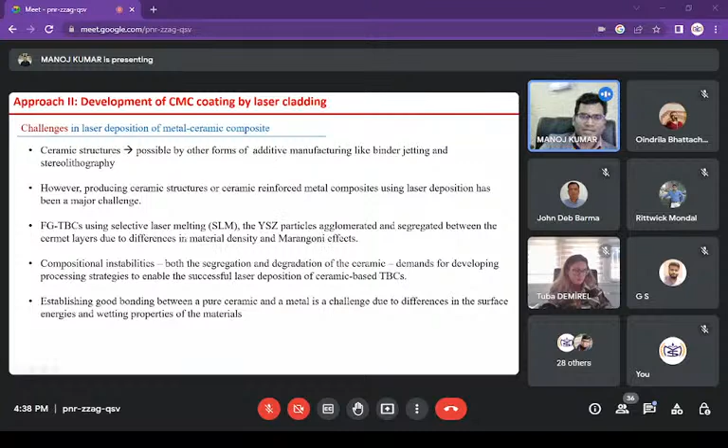The second problem is that the laser absorption coefficient of materials is different, as I said. Nickel, which is a metal, has a very good laser absorption of about 15 to 35%, whereas zirconium oxide has only 10 to 20% laser absorption. So when it doesn't absorb the laser, and if you keep increasing the laser power, it doesn't serve the purpose. So laser cladding becomes difficult, and if you keep increasing the power, the metal will start evaporating. That is again an issue.

So having an optimized zone of laser processing is very important. We had to do lots of trials to come to a narrow window of processing parameters. So we took YSZ powder, which is yttria stabilized zirconia, essentially ZrO2, and then we also took Inconel 718 powder. We mixed them together in the proportion of 5 to 40% YSZ, and we started depositing over the Inconel 718, trying to understand what happens with the process.

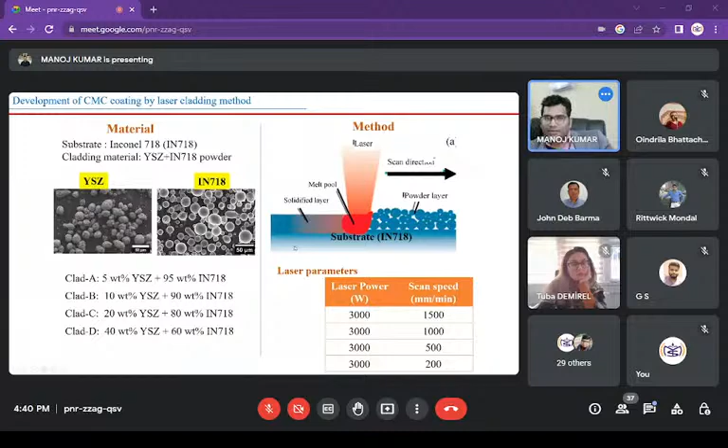So this is how the process looks like: you take a substrate, put the mixed powder over it, and then pass a laser. This will melt and deposit over the substrate. After deposition, we took a cross section of each. We deposited a single track for preliminary understanding of how the behavior changes with the change of oxide content and also the laser parameters.

Not only that, at 40 weight percent we can see even some kind of crater. So this is not allowing the YSZ to get deposited over the Inconel 718. So depositing higher amount of oxides, even mixed with metal, is a very, very critical and difficult task. So that is what we are trying to work upon.

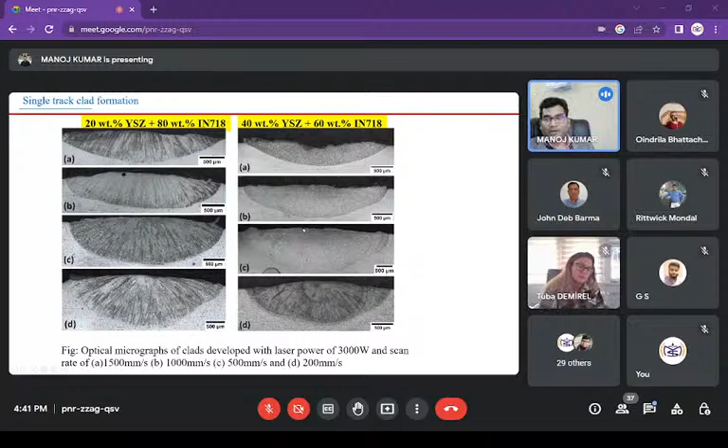So then we try to analyze this. We find that when we increase the laser power or laser input energy, the deposition will increase, of course. So this is the scan speed, how fast you are moving the laser beam. If your movement is very fast, that means laser is interacting for lesser time with the material, so laser input is less, energy input is less, so deposition will happen smaller. So the way we are decreasing the scanning speed, deposition is increasing.

At the same time, when we are increasing the YSZ component, I mean the oxide composition in the clad powder, the thickness of the clad is reducing. So this is one of the key points we understood from this experiment.

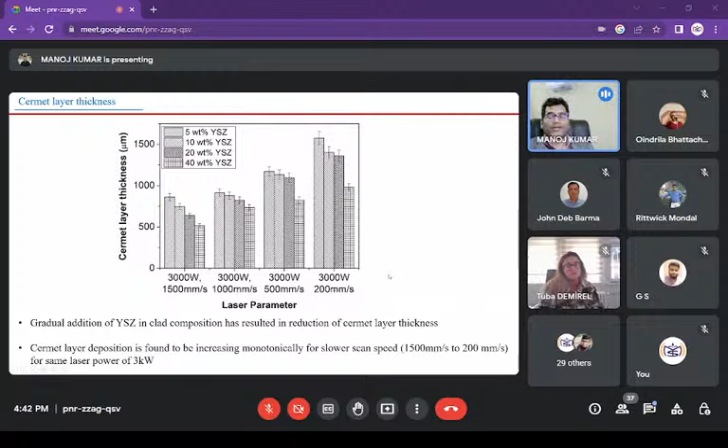Another key point we could observe here is that when we deposit a significant amount of oxide, not all of it goes into the clad zone forming the cermet layer. Some of this YSZ powder gets deposited on the top surface. They behave like a slag. So when you melt metal and oxide together, you cannot force all the oxides to get mixed with the metal into the clad zone, and some amount of oxide comes on the surface and gets deposited separately.

And this is the problem. We did not expect this. The problem is that this is the cermet zone which has both metal and ceramic, but this top layer is purely ceramic. Now if you want to have another layer over it, it will be very difficult, because this pure ceramic will not offer very good adherence to the next layer. So the problem lies not only with the fact that we are not able to push all the oxides into the cermet layer, but also this extra deposition on the surface is hindering the next layer of deposition over this first clad layer.

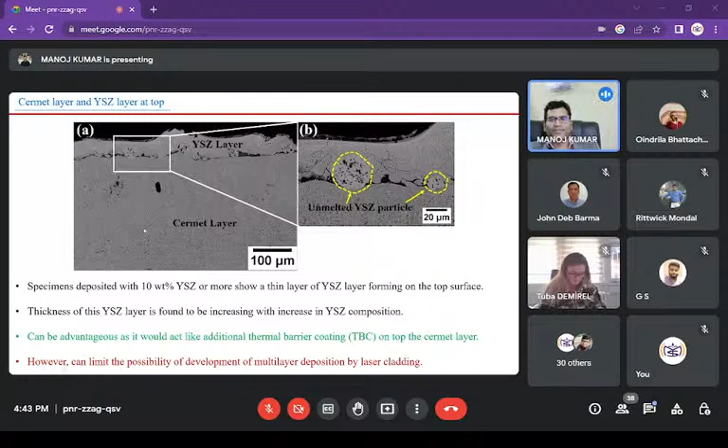So this problem still remains unsolved, and we are still trying multiple ways to handle this. If this could go deep inside the clad zone, it would also offer more strength and more thermal barrier effect, and at the same time it would allow the next layer of deposition, making thicker cladding possible. Now we also wanted to understand how the phase evolves during processing.

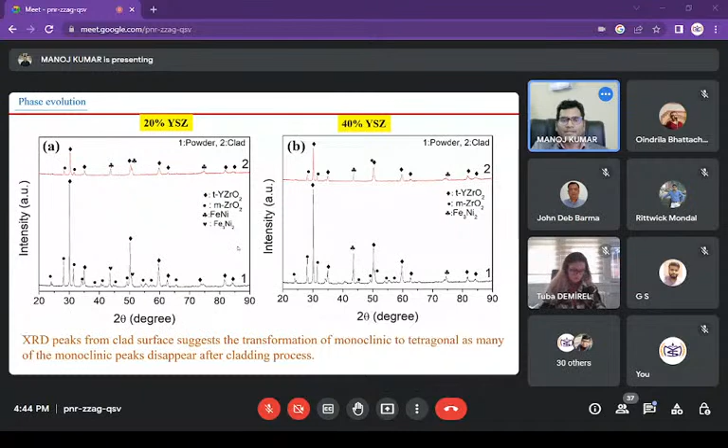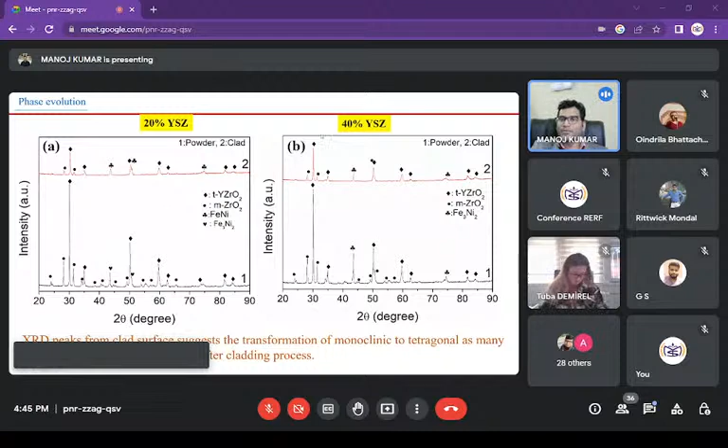Why tetragonal? Because tetragonal is a stable phase, and it does not transform upon exposure to high temperature. A stable phase is always preferred for better stability of the component. So that is one good thing we achieved, that laser processing also stabilizes the tetragonal phase of YSZ. We observed this for both cases, where we used 20% YSZ and 40% YSZ.

Now we try to understand what mechanical properties are affected by this and how it evolves. Of course, the substrate will have lower hardness because it is purely metallic, and when we have a cermet layer, we see an increase in hardness.

The substrate is having 3.8 GPa, the cermet layer has 6.4 GPa, and the YSZ top layer has almost 3 times that, almost 18 GPa, which is characteristic of a pure YSZ layer. So this again reconfirms the existence of a thin continuous layer of YSZ.

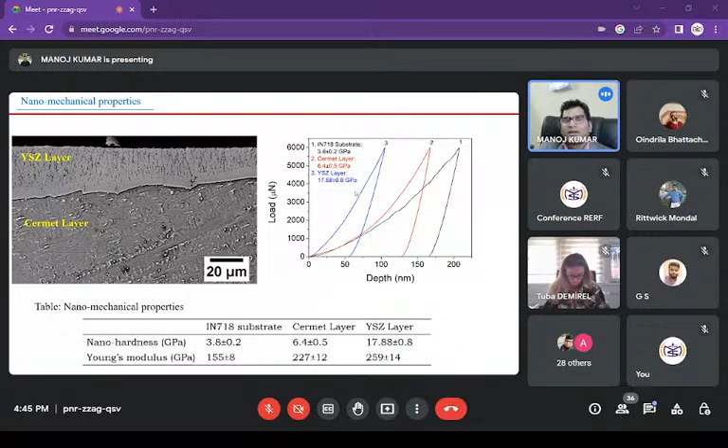Now summarizing approach 2, we find that it has a very different microstructure compared to typical deposition of thermal barrier coating by plasma spray. In plasma spray, we get a splat-like morphology. Here we get a dendritic structure, which is advantageous for retaining strength at elevated temperature.

This is possible because the velocity of deposition is very different in this case, and there is an absence of melt pool in atmospheric plasma spray. In plasma spray, melting is partial, not complete, but in laser processing we melt it completely. So when a complete melt pool solidifies, it has a different solidification behavior compared to solidification of a partially melted melt pool.

Upon resolidification, we find uniformly distributed fine YSZ particles. That is another desired property we achieved, assisted by very rapid cooling in laser processing. It cools at almost 10 to the power 5 Kelvin per second, which does not allow the diffused YSZ particles to come out. Majority of YSZ particles cannot come out, and they get entrapped during rapid cooling.